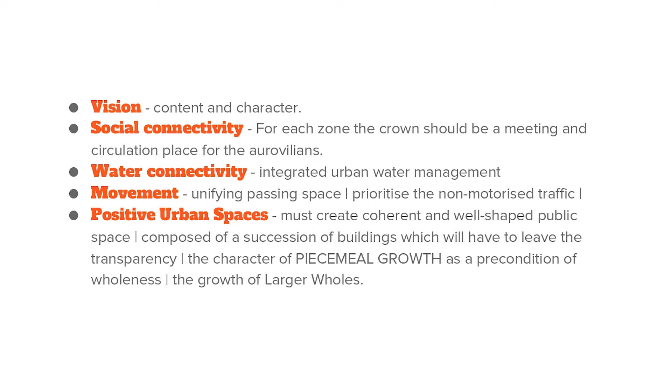Positive urban spaces, again—the spaces that we should create along the crown should be more coherent, more well-defined, and we try to see how they can be porous so the spaces can flow in and out.

Many of us have done that in our proposals, but we're specifying it so we see our explorations through that lens. Piecemeal growth is anyway there for Auroville, and we don't see that going away given the growth rate we have. But if we could make piecemeal growth a precondition to the larger whole, then we are playing safe, because the larger wholes are there all through.

Green-blue infrastructure is primarily what we are looking at. A ridge, we all know by now, has sheet flow and gully flows, as well as channelized flows. Looking at these water flows, we are trying to propose some kind of integrated urban water management by doing catchment along these.

If you see, all these larger things are actually the porous points which already exist, so we are enlarging them, and these water bodies could be reused or recharged. Where there is a denser area, the water bodies along whatever development is done could be reused, while at other places the water could be recharged.

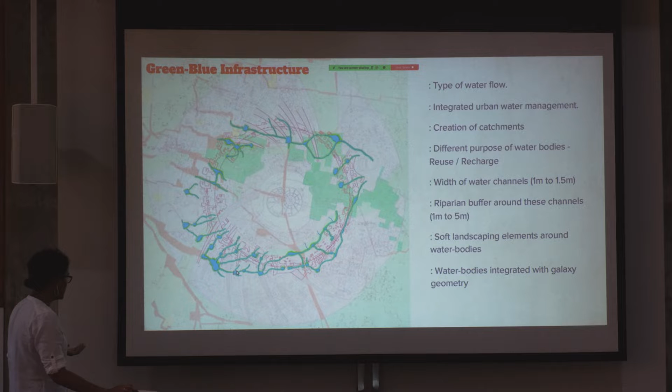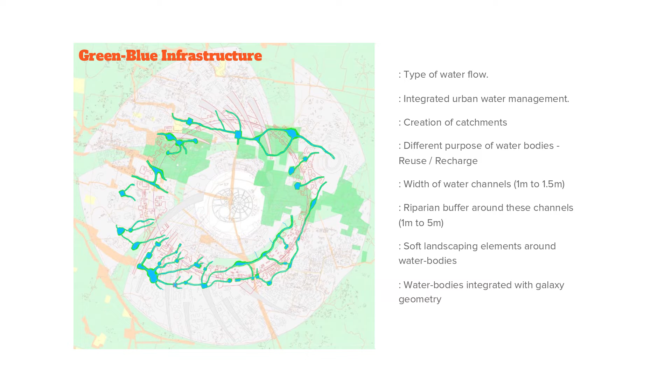We tried to make a little effort here, which has to come further in our next explorations, so that the water bodies, the way we design them, could integrate the geometry of the galaxy. These are just a few pictures of dry creeks and wet creeks, and how these water bodies are used right now when they are full. This is our social fabric, and it's interesting that we carry that social fabric forward.

One thing to add about water is, usually what we see outside is integrated water management, but now it's urban water management, which is not a fully researched or fully defined concept yet. All the cities are experimenting on their own, looking at the width of channels and riparian buffers. Everything is still mostly a research area. That's why it fits Auroville very much - this is a place where we could experiment and show the world this works for us, so why not try it in your place. That's a beautiful opportunity for us around water here.

Coming to proposed movement, as she mentioned, our priority order is non-motorized traffic on the crown, then accommodating light traffic which is needed, and also heavy load traffic for trucks used for construction work, service, and emergency related needs. What we are saying is 5 to 7 years of immediate implementation is what we are looking at. Mobility works for a little longer, but for development and everything, we are focusing on 5 to 7 years as the timeframe.

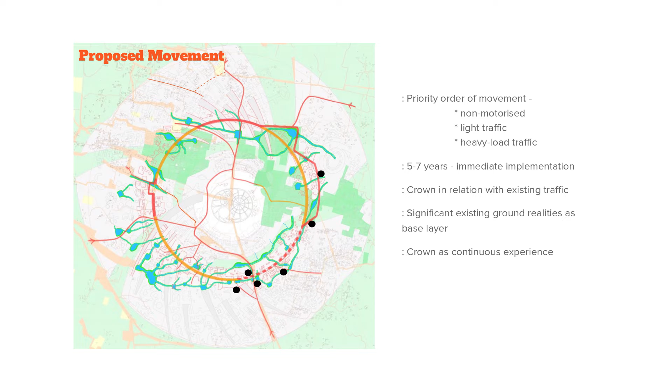Crown in relation - we are not seeing it in isolation. It's very hard to see it that way. It has come across in all the presentations we saw this morning, so we are seeing it definitely in relation with all the outside influences, internal needs, and significant existing ground realities like water, which are very much the base of our exploration. We're looking at crown as a continuous experience, more than any other physical element like a road. It's a continuous experience - that's what we want to highlight.

If we look at this area, we'd start here where the solar kitchen is. From here to the visitor center, to this office, the Matri Mandir gate road - this whole stretch encompasses sectors 3, 4, and 5 of the residential zone. What we're proposing is that we have a parallel road about 300 meters away which serves motorized traffic perfectly, and this is non-negotiable for us for the next 5 to 7 years. So we're only proposing a cycle path along this whole area, continuing to use the motorized vehicles road, and creating more capacity if required - this serves the whole area now, and can be increased as development comes along, while keeping this cycle path as the crown stretch.

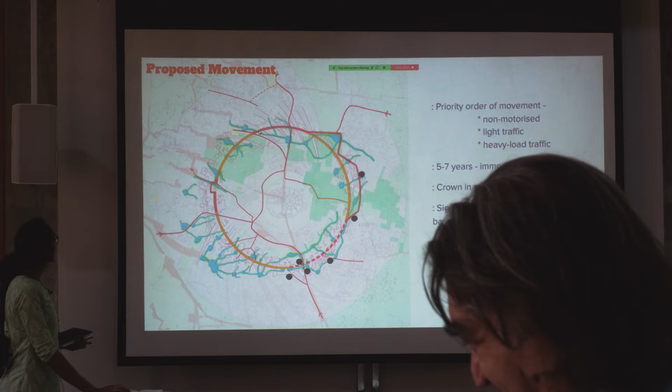Then when we go in front of Unity Pavilion, till this road, this is the language lab, and here we have the Kotakarai road coming and passing through this poramboke land. So again, what we're doing is making this area motorized, because this road needs connection, and if we make this motorized, people are discouraged somehow from using the other road, which is not in very good riding condition. This area gets a little traffic relief, and from here this is the stretch of Darkali forest.

Here we are again coming to a similar movement pattern of only cycle paths. It was very interesting to see that Fabian's proposal has a little bypass from Kali Temple Road, which we would like to consider in the next stage of our proposal. It can still serve the motorized needs for traffic, while this path is kept very serene, as only a nice cycle path.

From here, this is the stretch where we don't own - it's all non-Auroville lands mostly - and this stretch is again motorized, which is essential at the moment for serving the industrial zone's traffic. When we have this road connecting from outside the axis, and we have this already done, it can serve the interlink of the industrial zone - this is already the paved stretch. We continue the motorized traffic over there.

And here is the Bliss area, and again it makes more sense because this road serves all the schools, the school buses, and a lot of traffic outgoing and incoming that is not essentially Auroville's can also still continue using that as a road.

On the crown, we continue the cycle and pedestrian path. Here is where the last school roughly is, and from here, if you observe, here is our Gaya field. To go to Gaya field, we ride until that field and park our vehicles there. It's just another little extension we could do, but the key is there is private land here, which means we'd have to buy that private land to make this happen.

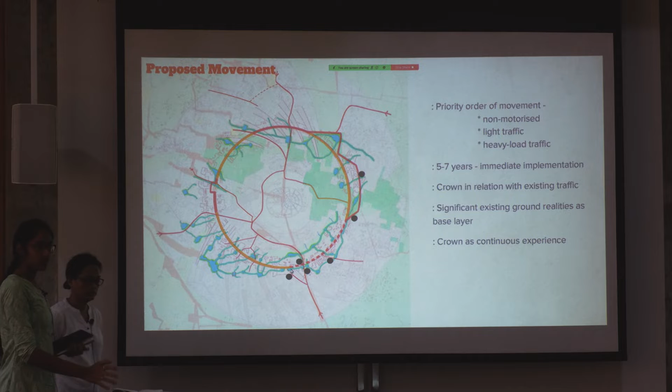Then here, which is the stretch we experience every day, especially people on the crown, we propose a timely movement. Like the live example of the promenade, it closes to motorized traffic after 6 in the evening and opens only after 6 in the morning. That is the time when residents, the people living over there, come together, and the place becomes active.

We don't need to find parks or playgrounds or spaces to hang out outside, but we do it right in front of us. We are connected to that place, and we don't need to go away to find entertainment. So that's the idea of doing that.

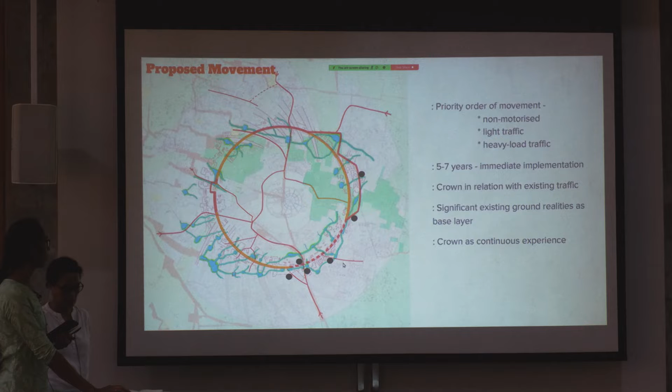We are proposing that to do this, we practically need some parking spaces which would help us park and then take a walk. So this radial, the Vikas radial, can do that, and we propose some stop points here, and a parking space for hopping from vehicle to walking.

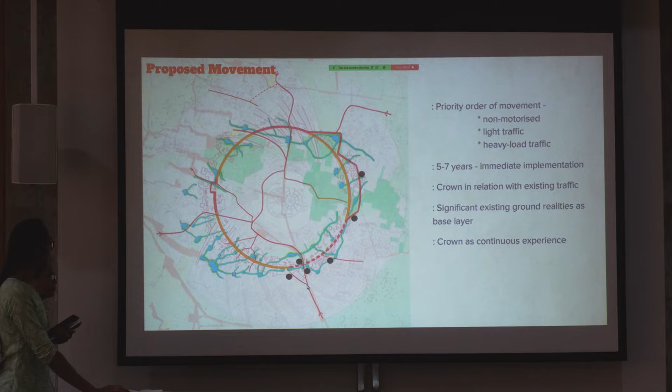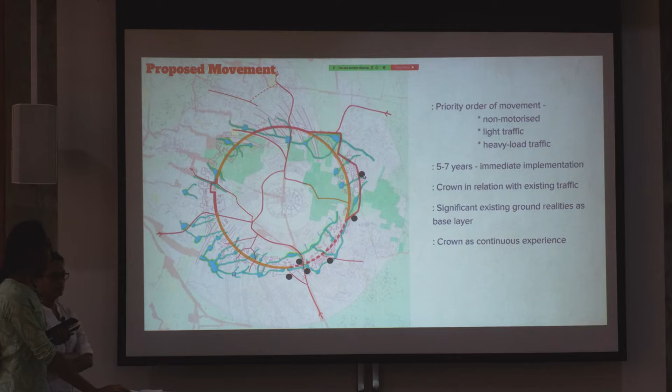This existing connection can serve the purpose for people needing to bypass instead of going on the crown. And for the people over here, I forgot to mention, the parking spaces for residents, and Kalabhumi and Kripa can move outside, with entry from outside. So we come in, and then the crown is like a surprise - that's the kind of experience that comes in.

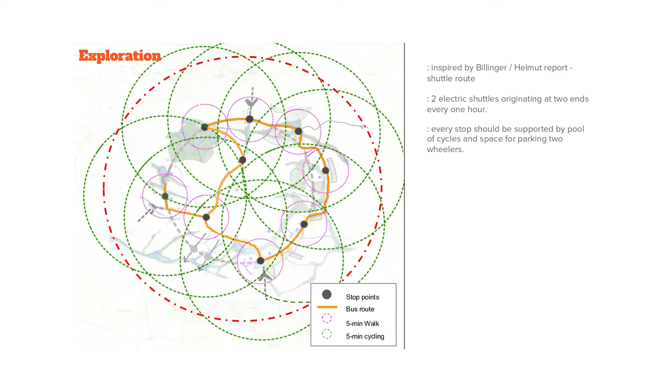This is an exploration of having public transport. We are proposing some stop points, and from here, the Unity Pavilion, the bus route starts - it could be a bus, or actually a small shuttle.

An electric shuttle, which goes and takes people every hour. We have shuttles - basically we start with 2, and as the population grows, we can increase the frequency of these shuttles.

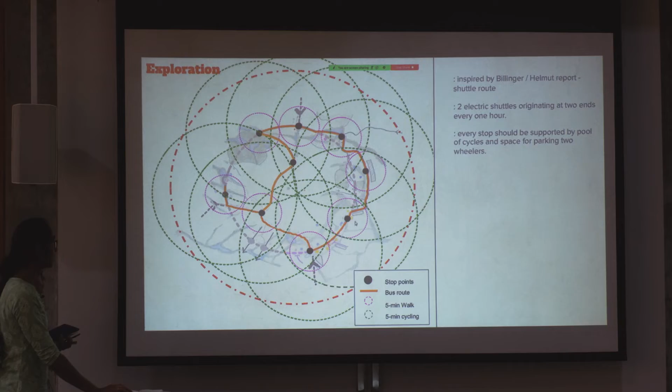This pink line shows the walking radius from the stop points, and the green line shows the cycling radius in 5 minutes. This is where we could cover pretty much the entire city on cycles, and we are proposing a pool of cycles at each stop point, so if I come by shuttle, I can take a cycle, finish my work wherever I want to go, come back, and get on the shuttle again whenever it arrives.

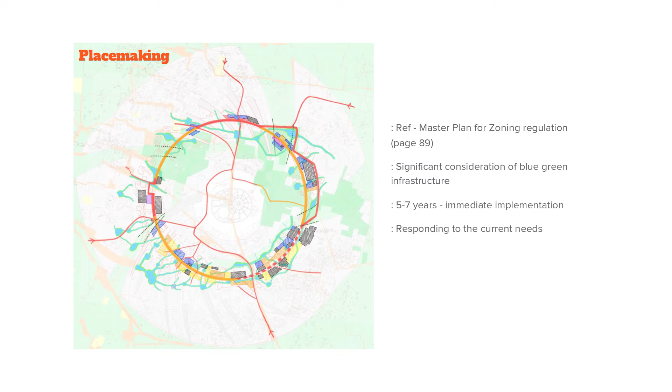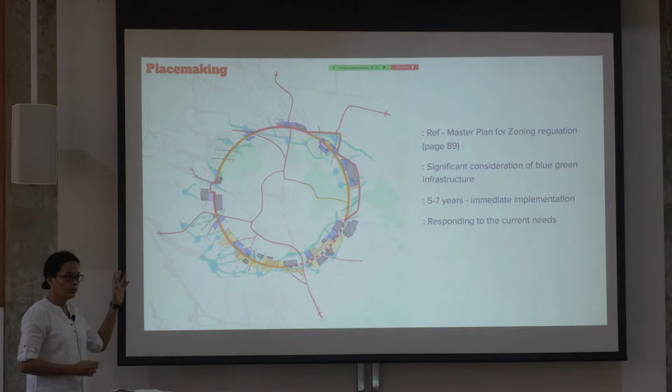Placemaking is another thing we tried to do along the crown. Here, the approach we have taken is to refer to the master plan, since it has zoning regulations given, so we've taken that as one of the guideline documents. We have also considered the blue-green infrastructure shown in our previous slides as one of the primary things to do the placemaking around it.

As we said before, we are looking at only 5 to 7 years as an implementation plan, not going much further than that. And of course, we are responding to the current needs emerging from our dialogues, from our living here and our experiences.

So the first stretch, which is sector 3, 4, 5 in residential zone, has Mahalakshmi Park and Maheshwari Park here. As we know, sector 1 and 2 is our priority of development for housing. In the next 5 to 7 years, we need to have some housing, and we could have mixed housing along here, because this is one of the primary roads catering to these places. So we could have mixed dwelling units.

We could have guest houses, because right now we have guest houses, and we could have a pool of guest houses there. It fits in very well if you look at the master plan zoning and how Roger has also envisioned the crown. Guest houses kind of things fit in pretty well.

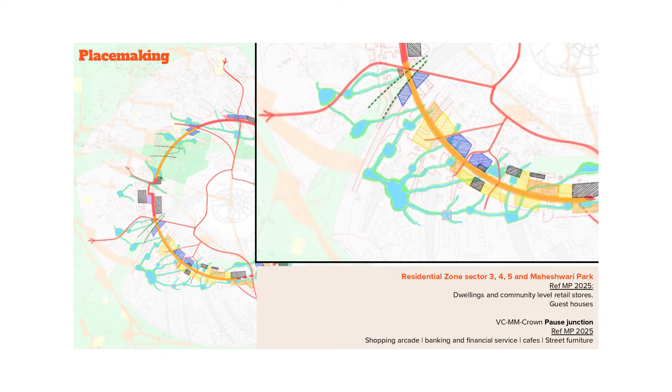This is the junction, which is visitor center and Matri Mandir crossing. So here we could have arcades, like shopping arcades, again this is from master plan, so I'm just reading through. Cafes could have banking and financial services there.

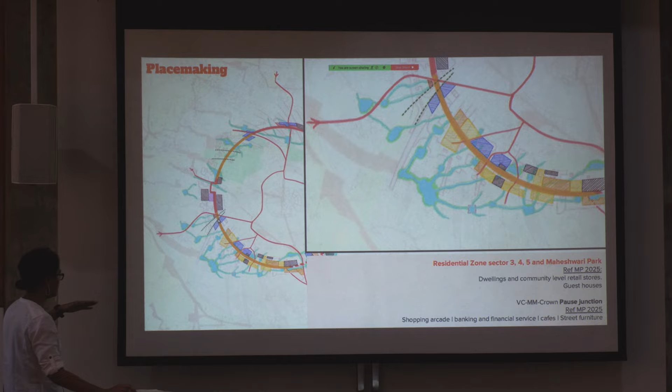The other thing we are talking about is this pedestrian path not being on the other side. From here we are stopping with a barrier so that people from here don't walk on this side. Only the tourists do.

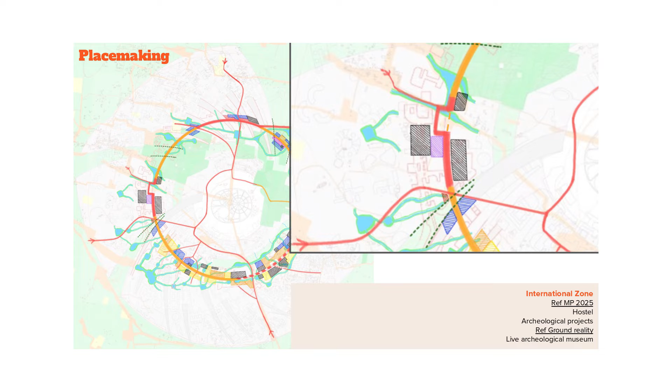The next stretch is Unity Pavilion and Savitri Bhavan area. You see a little meandering here, because we want to give importance to the archaeological site existing there, and archaeological projects are also part of the master plan.

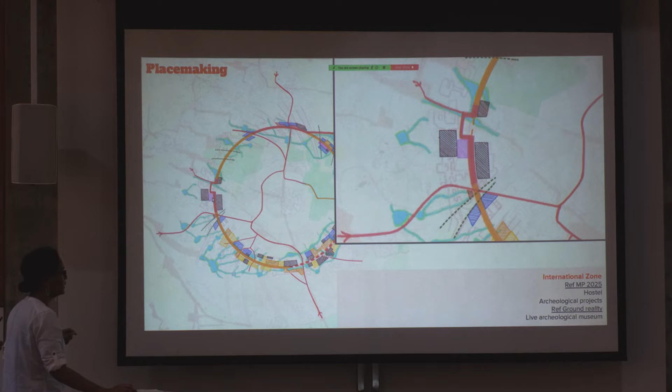We feel the current need, and also as part of master plan zoning regulation, hostels could fit in very well there. Yeah, so this is from master plan.

This is a megalithic burial ground map that we found. Basically when there was an HT line laid in 2014 in that area, I think Aurodam to Centerfield, or that MMVC road area, about 1 meter trenches were made, and some artifacts were found in that area. In the digging soil, they found quite a lot of stuff there. So we feel it's important that we are sensitive towards this.

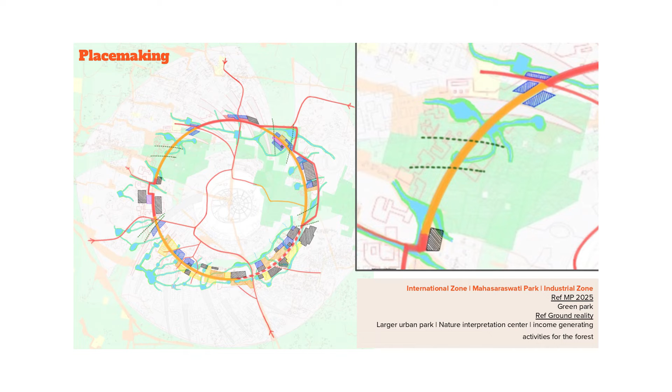This is going through Darkali. It's very interesting, Darkali right now has three scenarios happening here. One is international zone, then it is Mahasaraswati Park, and then it is industrial zone. So the zoning, or the placemaking, could also happen a little bit according to that.

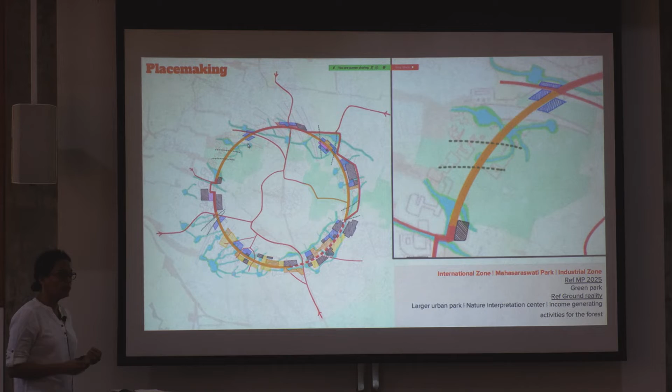So what we are looking at is keeping most of it as green park, but could have nature interpretation centers, urban parks largely. In the area where there is industrial zone, we could even have some kind of income generating activities for the forest itself so that they become self-sustainable in their own functioning.

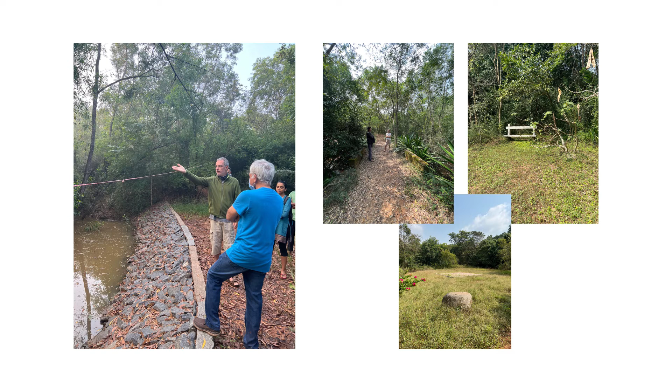So what you see here is where Gopal and we all are standing, this was from the morning walk. This is the fourth catchment, which is actually the lowest point. It's very important to know that this is the lowest point on the crown, and hence more of a reason to really protect it and be sensitive towards it.

What we saw while we were walking there is a few red sanders, which are, the botanical name is a bit difficult to pronounce, but I'll try: Pterocarpus santalinus, I think.

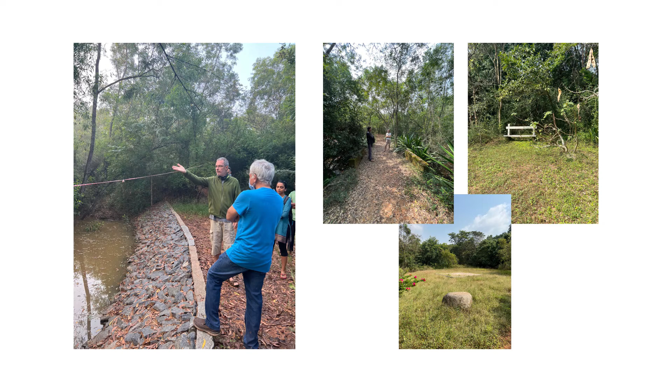So there are a few of them on that stretch, and that's one of the endangered species. It will be nice that we save them, protect them, have them, and also it's not legal, it seems, by law, to cut them. So why not have parks, since right now they have these spaces which are already park-like? Why not create more of these along that?

This is non-Auroville land. Actually, a lot of it is Michael Bonke land. So this stretch is already paved, and we could pave the rest of it. A lot of it is cleared already.

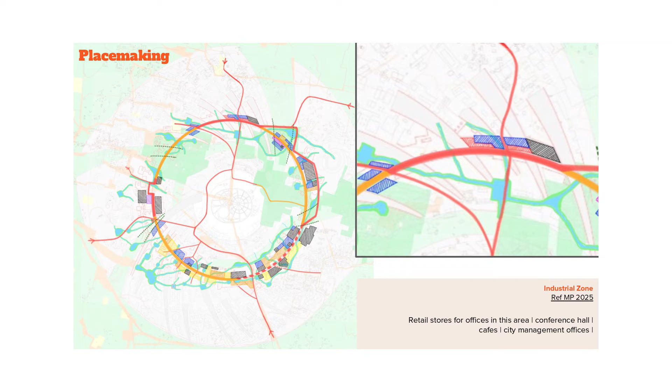So what we are talking of is having services and activities here which are more catering to the industrial zone, such as retail stores, or offices, or hardware stores which would support the stationery needs of offices in this area. Have conference halls so people can share a common conference hall instead of building their own in each campus. Have city management offices, courier service, postal service - these kinds of things which are day-to-day needed for offices to run.

The next is the youth plaza area. So here, like we said before, we are doing this crown, but more as pedestrian and cycle space. What we could do around this, in Mahakali Park almost all of it, is bring back some green there.

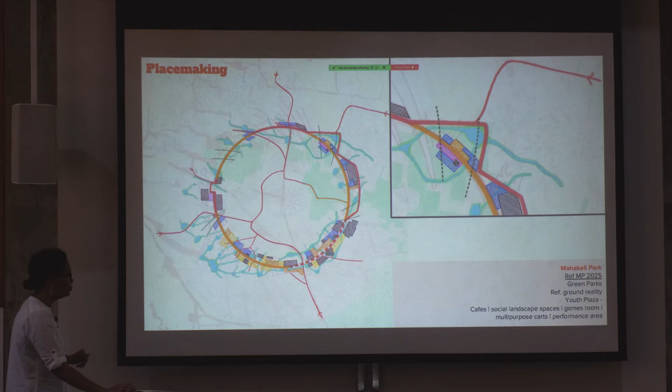And have a youth plaza is what we are talking about. We saw some proposals that Fabian showed, which were made by youth, and those could easily be incorporated here - cafes, social landscape spaces, fairs, youth fairs, multi-purpose carts, games rooms, performance areas, etc.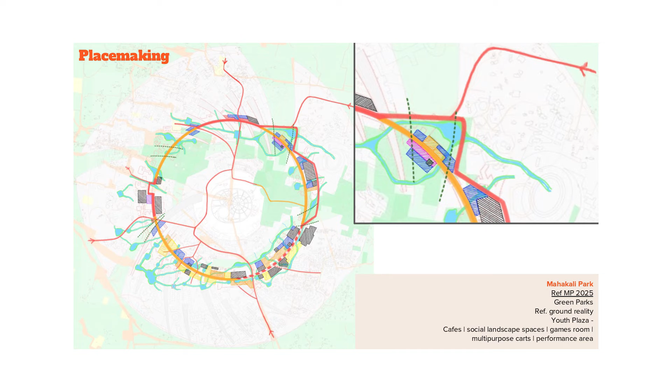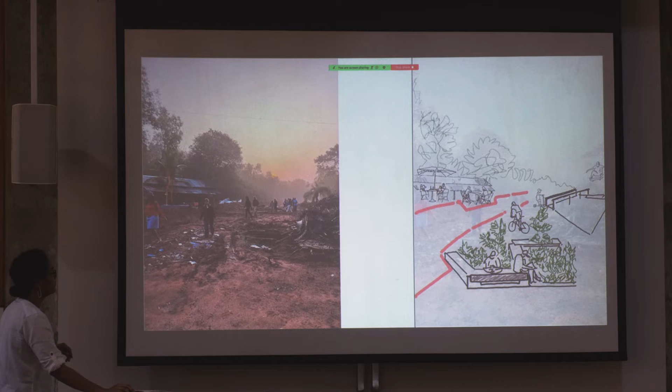So this is again from our walk, and even though it is cleared, we could still do things around it - have little landscape spaces and cafes. If we don't pull this down and convert it into a cafe like that, I don't know.

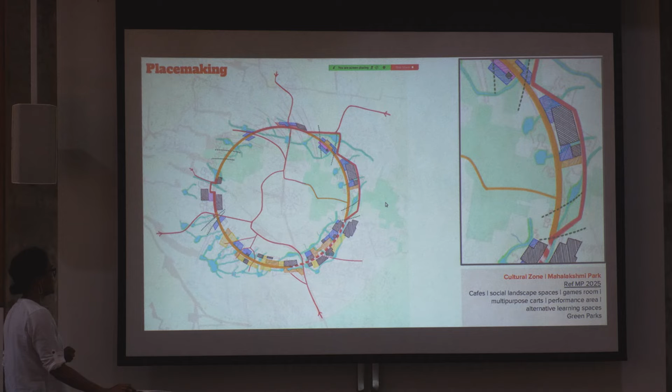The next stretch is through the cultural zone mostly, and a bit of it is in Mahalakshmi Park. So here, what we're talking about - right now the way Residents' Assembly is so active, our community is so active, there is a need for spaces to meet. There are very limited spaces, so we could have such spaces there.

We could have cafes. The other thing is, because of the cultural zone, education in Auroville is not just mainstream education, but learning is also happening through so many other alternative ways, so we could create spaces for those learnings also.

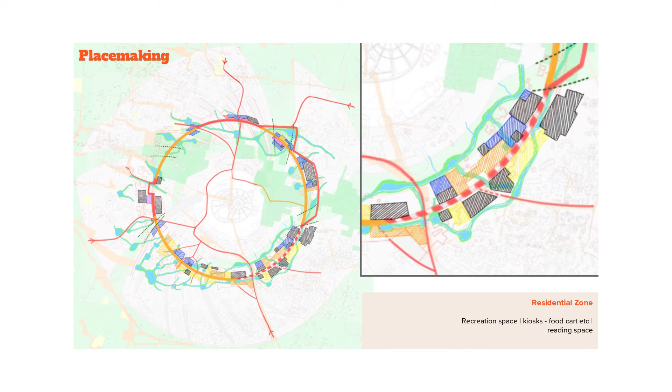A few more minutes, and then the residential zone. Here mostly the space, the activities and building projects we have, like health services or Mahalakshmi home, could have expansions. We could also, like Induja said before, it's good to have an evening life on this stretch - bring back some food carts, some chaos, have recreation around this stretch in the evenings.

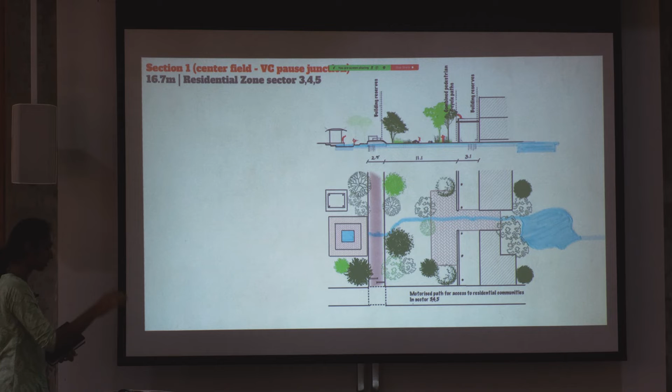Here we attempt to stick to the 16.7 sections, but in our own flexible way. We are basically trying to see how this 16.7 can be reimagined in different stretches. We have attempted some in different stretches.

This is the residential zone sectors 3, 4 and 5, which I talked about, starting from Solar Kitchen. What we mentioned was to have a cycle path, only about 2.5 meters, which is the building reserve area - in that sense the infrastructure area, according to the TDC section. It can still go under that, and this can remain a cycle path. There is water flowing underneath, there are culverts. The idea to raise it is to allow the water to pass through in various ways, like through culverts and other means.

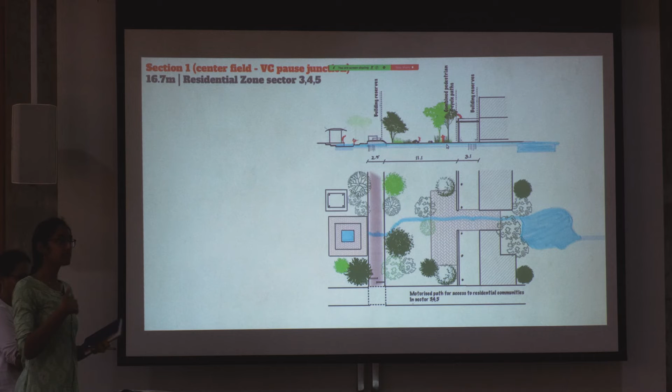And this whole area - there is another building reserve, the infrastructure corridor, which is 3.1. It can still have covered spaces and extended colonnades, which also help the buildings bioclimatically. This area is just not developed at the moment. It's kept and used in a different way, organized so that it serves the residential use as a support. That's what we are imagining in that whole stretch.

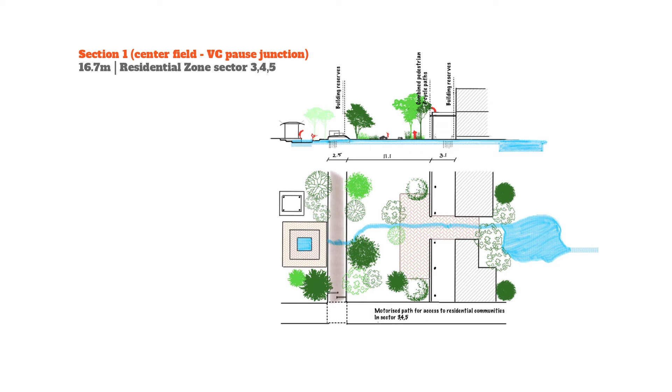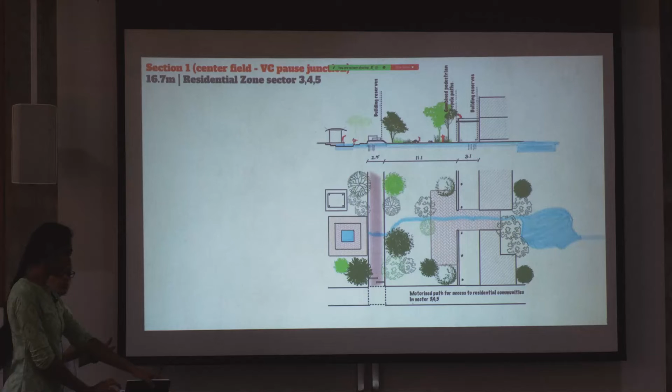So one thing is, at places where we know water is flowing underneath, we could do deep trenching for the infrastructure. Also, we are not very clear - when we talk about infrastructure, we are also looking at, for example, water distribution as a decentralized water system, so we do not know how much such large building reserves are required. We did it with that limited knowledge, and we will look at all other distributions, all other infrastructures, not only the HT line, which I think already goes through this area.

So once we have all those plans, I think it is more clear what kind of building reserves are required for infrastructure. In some places it could be only one corridor instead of two. We don't technically have the know-how yet, so that's why we are still sticking to this.

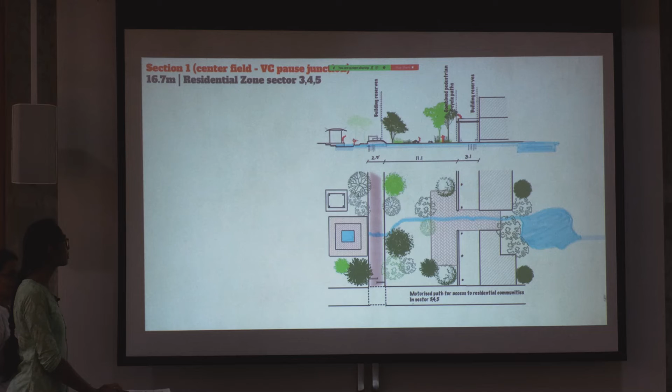Here you see this, there can be barriers which still connect this road from the other parallel road, and people can still cross the crown but not go through the crown.

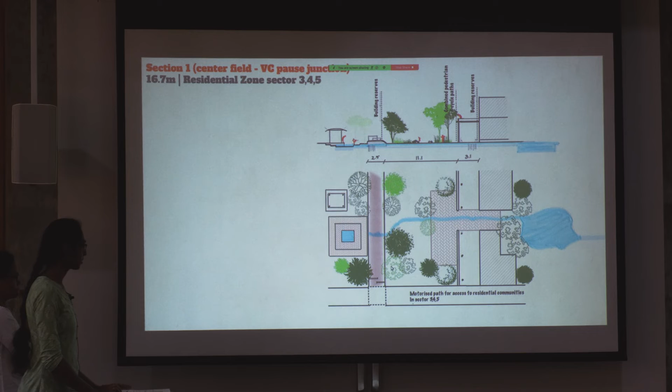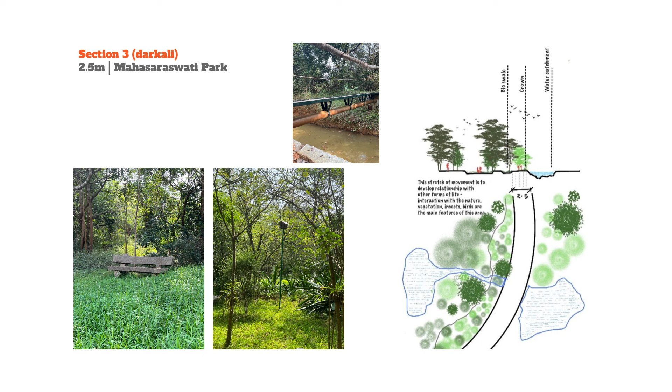Then this is the Darkali stretch where we are proposing again only the cycle path, without disturbing the forest much. Under that, we interestingly saw this photo where there is a waterway and the infrastructure is still undisturbed, and movement is also possible. So there is much possible with the way the place is, without disturbing it.

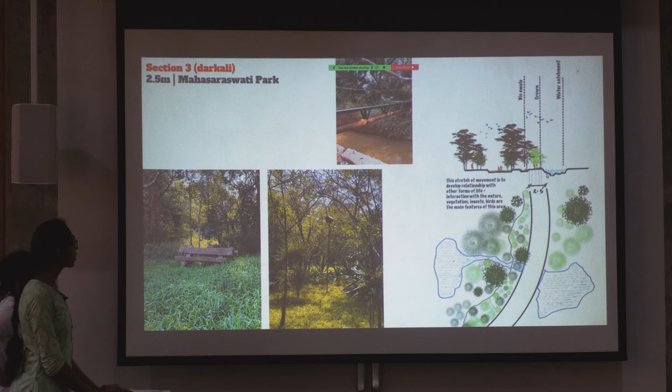That's an important thing, and the water catchments can be enlarged, and we can have more catchment here because we are placed rightly on the ridge. There is a lot more scope for us to do the water management.

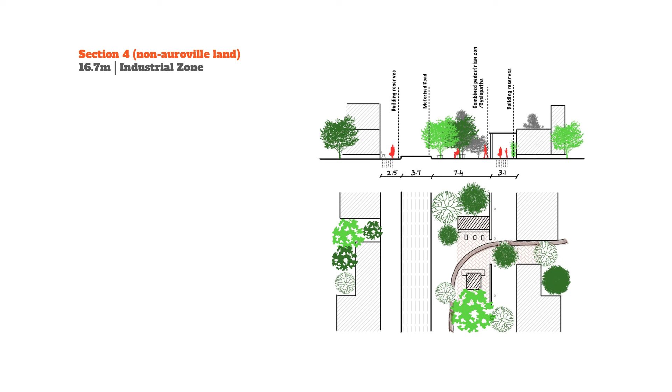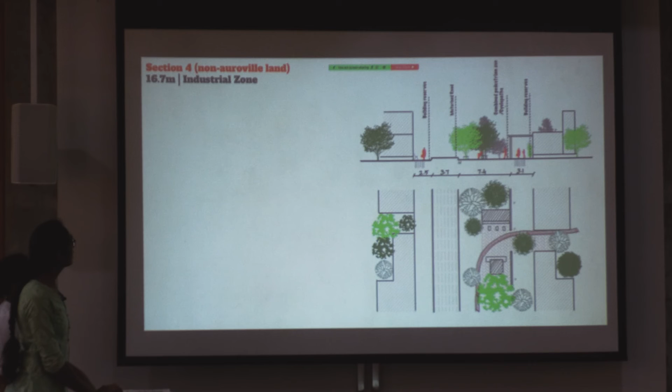This is the industrial zone stretch where most of Michael Bonke's land is. Here again the 16.7 is a little reorganized, and the motorized road goes here. This is the space where all these cafes, the kiosk for drinking water, and all those things can come.

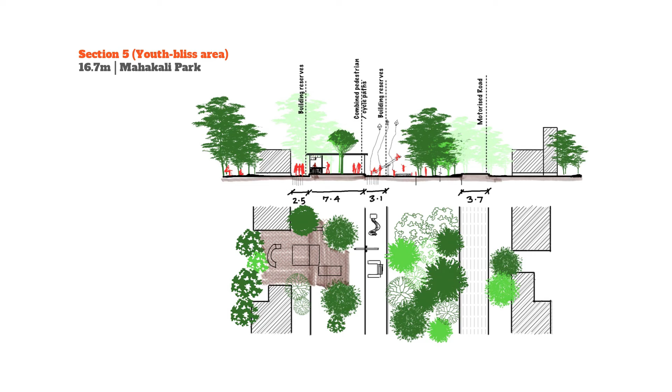This is the next stretch, which is the YC. This has given, in a sense, if we see it positively, the clearing has given a space for us to reorganize it differently.

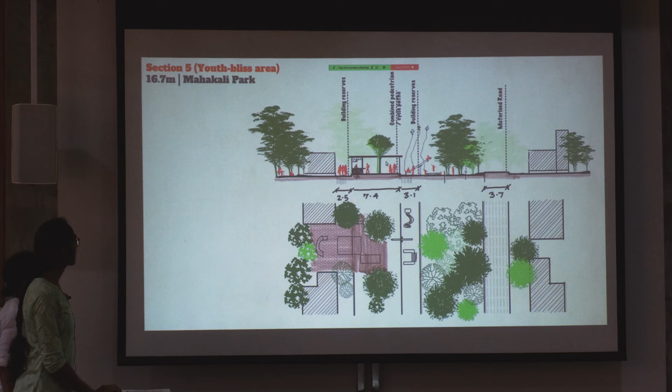What we are saying is it's a wide stretch and a lot of activities can happen. We know how that place is and how much more the place can be, with a lot more trees in the middle of the crown, giving shade perfectly and a very different experience, and space for everybody to get in there.

This is the cultural zone stretch in front of Cripa Kalabhumi where we are proposing a bypass of the road. The road goes again behind that area. Here again the 2.5, 7.4 combined pedestrian zone, and the infrastructure corridor continues.

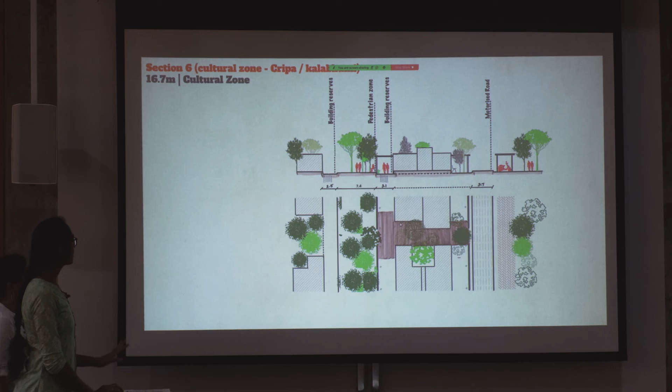Spaces are passing through, and there is parking behind. So the movement is there, the continuous movement is there, continuous experience of the crown is also there. This is our last stretch.

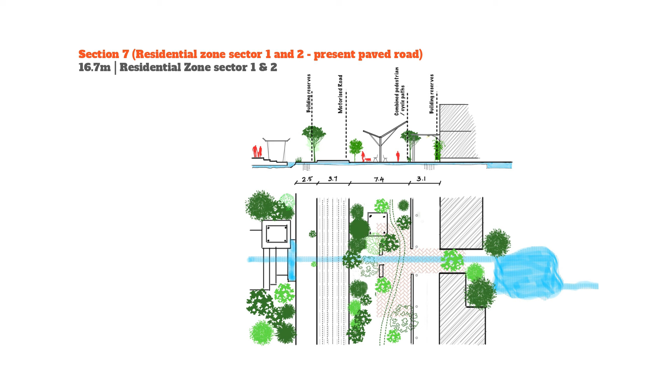This is the residential zone, existing residential zone 1 and 2. Here it can again be the water, because now the infrastructure is already laid. There can be an overland flow like on the road, like how in front of Ilaignarkal there is a little dip in the road. Those kinds of things can be done.

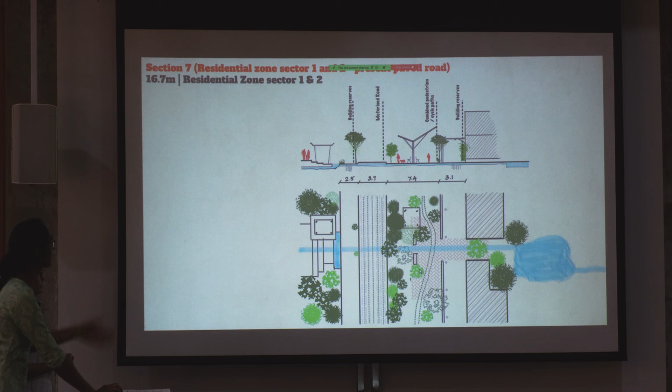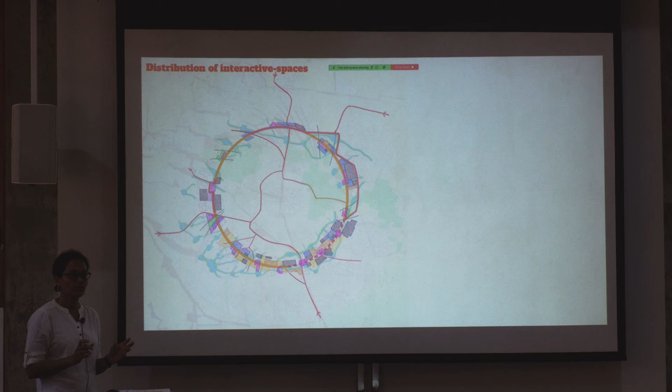Again this is the space where we got to reorganize and bring back the social life. It can be meandering cycle paths, pavilions, and all that. This is something we got inspired by from Henrik's presentation last time, which was interactive. He called it something else, public plaza, social spaces. We are calling it interactive spaces, which is along the thing.

What we're talking about is, we looked at every 200 meters and saw the possibility. There were naturally many things already happening, we could just enhance it and have that, and the human experience. We will leave it here, we won't talk more. This is basically what we think the kind of experience people can get along.